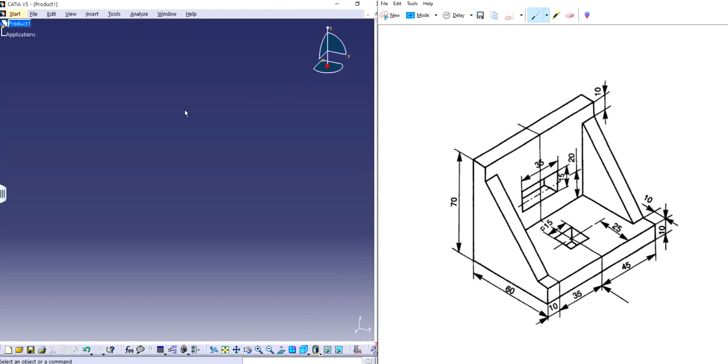So let's get started. In here you can see that this particular part, it's pretty obvious that it is a simple part, but I want to design and show you how would I personally like to design it. So I'm going to open a part and name it as part number 4.

Inside it, you can choose any plane to start with. It's not that particular, but I know that as this part is symmetrical about the axis, I will just make one half of it and mirror the other half. Or you can simply make whichever way you personally feel comfortable, and try to figure out what would be the best scenario for you to make it happen.

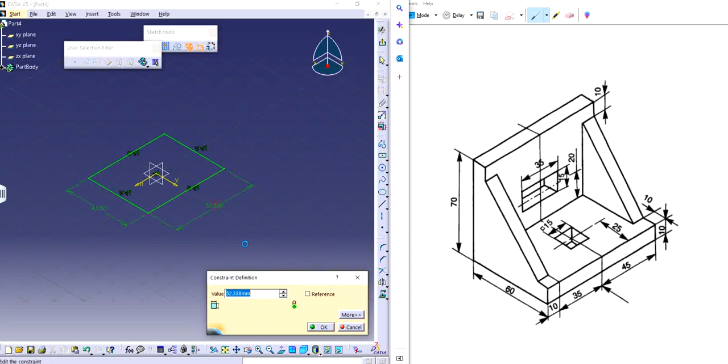First things first, you can start with the base if you want to. Let's say this is isometric view, and I'm going to make a center rectangle right in the middle of the particular dimension. The length is going to be 45 plus 35 plus 10, which equals 90, and it's going to be 60 on the other side as well. For the width, 60.

Now I can exit out and use the pad feature. I know the thickness is 10, so I add the thickness to be 10. So I got the base plate for this particular part ready.

Now if I want, I can come onto this top view. Again, I like to work in isometric, it's just my personal preference. I'm going to project the back end and make it as construction, either by double clicking to make it a construction element, or single click and then click here for construction element. Don't forget to press escape and then undo the construction element, otherwise whatever sketch you make after this will also be a construction element, so just avoid that.

So I'm going to use a simple rectangle now instead of a center rectangle. I have to just make the side of it, so I'm going to use this way. It's already constrained, I'm just going to add thickness, so thickness of that particular face is also 10.

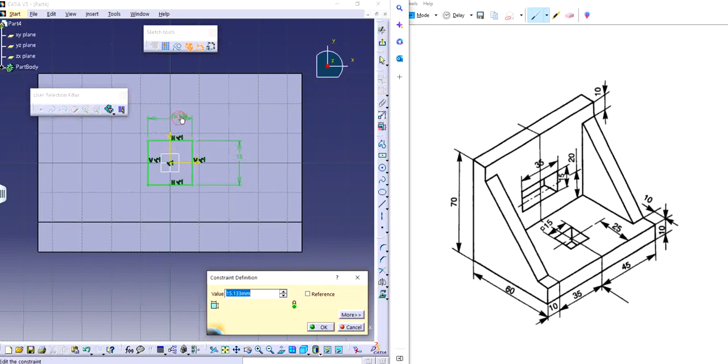I'm going to use the same principle right here. It's already in the middle, so I don't need to do that again, I can simply dimension it. As it says, it's a 15 square, so it's 15 on both the sides, 15 along the length and also along the width. I'm going to do the same thing, exit out, click on pocket, click out. There we go, I have both of them now.

But wait a sec, it's not in the middle though. I forgot to make any changes, my bad. So the sketch is not starting from here, it's center rectangle, but not probably in the middle of the part.

So 15 on both the sides, 15 on both the sides. And then the dimension from here on the one side is 25. So this one is 25, unlike the other ones. There we go. I hope it's visual.

Exit out. Yeah, there we go. So now we can add stiffeners.

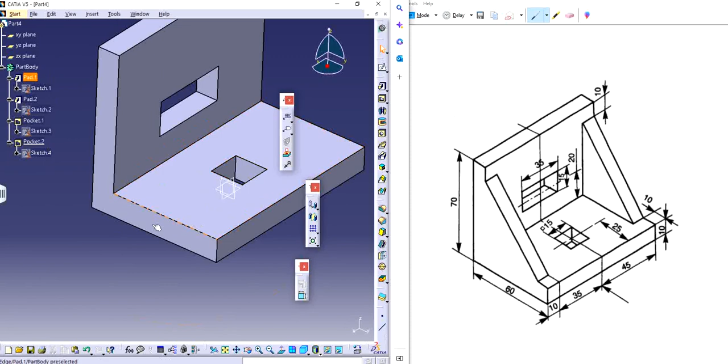I will simply make a sketch on the left side on one of the edges. I have to project it, or let me try with just a particular line. But still, I need to have a projection to showcase where to start and where to end. So two lines with construction, click OK. Do not forget to unselect construction. Make a straight line that you want to have and dimension it accordingly.

So I know that from the base, I need to leave 10 from the base to one edge. So this is going to be 10. And from the top as well, it's 10 as well. So from top till this particular point is 10. So both sides 10 each. I'm going to exit out.

So I have stiffener conditions ready. I can come here. Next to solid combine, I have stiffener. It says invalid profile. I can see that it was showing an error. I do know it's 10. Let me try if it works. There we go. So the stiffener.

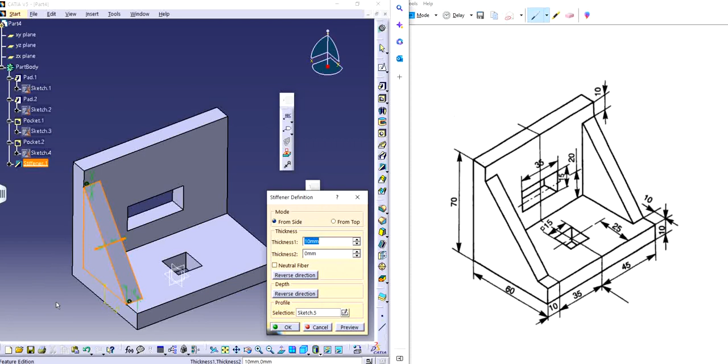So the error it was showing is invalid profile because of the fact that it was trying to make it on both sides, but on one side we don't have any physical material. We just have option to extrude it towards one side where we have other two bodies as well. So that's why I did this way.

So now I can simply select stiffener and use mirror feature. And mirroring element is going to be this particular plane along that, and here we have it, right? So this is one way of designing it.

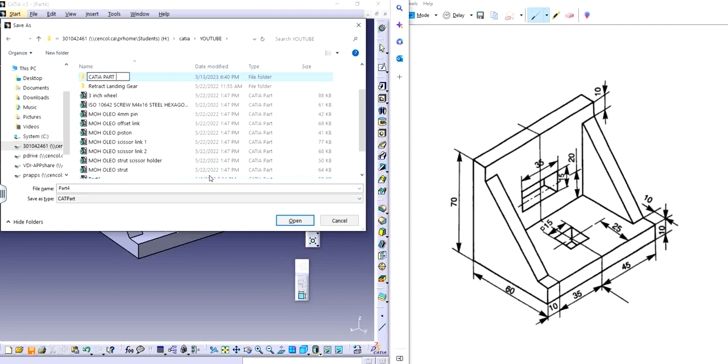I'm just going to quickly save it, and this is going to be part 4. So Catia part 4. I'm going to quickly save it, part 4, and let's say.

So this was the easy way of designing the same part. If I have to design it in a slightly complex but time efficient way, what I would do is delete everything. What I would have done is I know that this L-shape feature is mirror and symmetrical about everywhere.

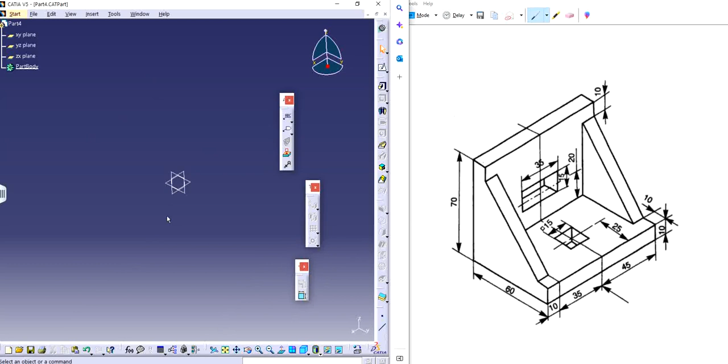So I will come to this particular plane. I will make an L shape. Either I could have simply made an L shape and extruded it, make an L shape.

So now what I will do is I know that this whole entire thing is 70 right here, and this length is 60 right here. So I don't need to be very particular about where exactly to start from, or I could simply keep this right here on it, and this particular point to be coincided with this right here. Coincide, there we go. Fully constrained, exit out.

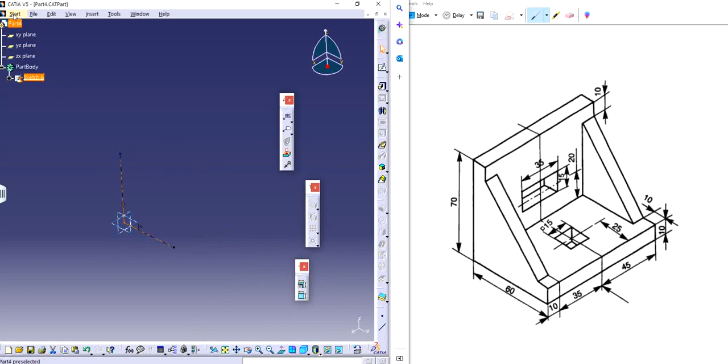I have two options. Either I can simply switch between generative shape design. I know this is weird, that I'm going all the way around and then trying to make something happen. So two ways is I can go 45 and 45, right? So 45 each side, mirror extend 45 and 45, and I click OK.

And then if I just simply want, I can add thickness to it once I go back to the part design, because part designing and shape designing or generative shape designing are compatible with each other. So I can do this.

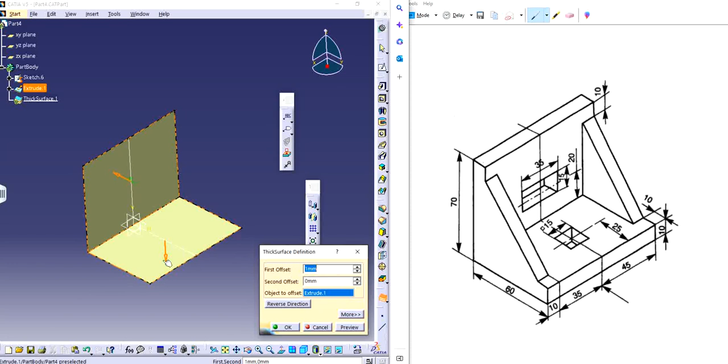So I can add thick surface to this particular part right here. So I can see the direction as well. I want to add it in this way. So offset is going to be, I know the thickness is 10. So let's see. There we go. This thing have 10 thickness throughout the way.

So now if I want to add stiffener, I can simply do the same thing that I did in the previous video. Add L shape, I already have it. I'm going to project these two lines, make a line. So this process is going to be the same.

This thing cannot change. This is again 10. I make it 10 and do the same thing in here as well. 10 and 10 right here. Exit out. Go to stiffener.

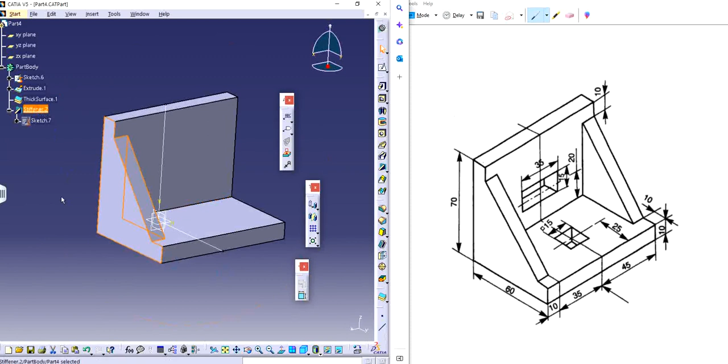Add stiffener. Neutral fiber, one side, 10, it says good. I'm going to use the stiffener, mirror it about this particular plane, and I can make pockets as well.

So if I really wanted to make any pocket or extrusion, I could have simply made it on the extruded surface as well. Instead of me coming here and doing the same thing, I could have made changes to that. But anyways, now we are already here in the part design.

You can simply add a center rectangle and to the same feature, dimension it whatever you want it to. It's 15, 15 one side, 35 the other side, and then it's going to be from here till here, 20. There we go. And then pocket it through all, doesn't matter.

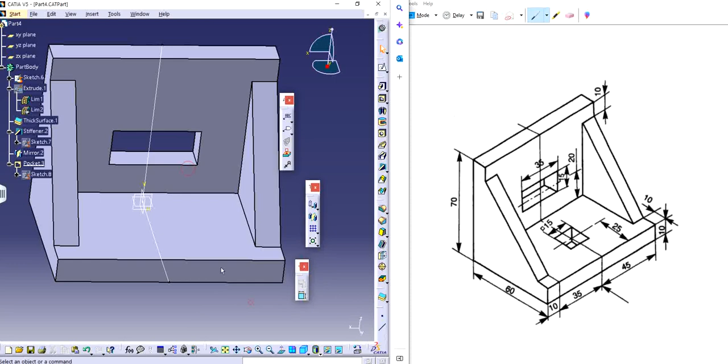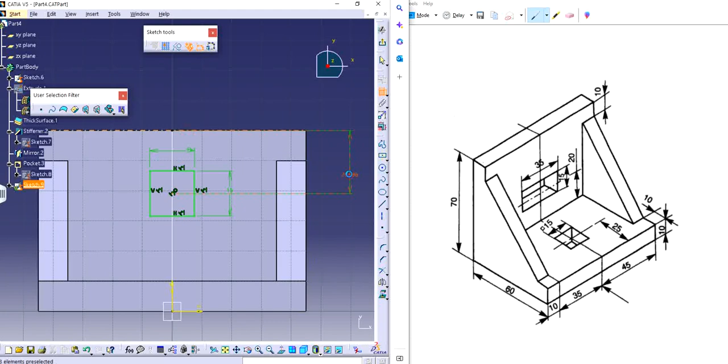So I can hide this particular skin. Same goes here as well. Make a center rectangle. Dimension it, 15 both sides. 15 this way, 15 this way, and 25 from the edge. That helps a lot. And there you go. Exit out.

Pocket it through all. I'm going to hide this particular line. Hide. There we go. Again, the same thing is made in slightly different way using part design feature.